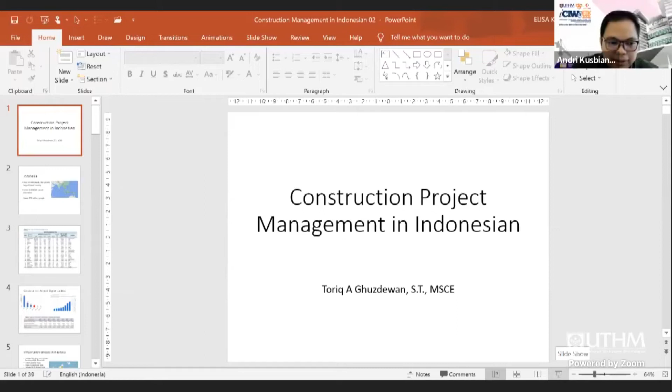Assalamualaikum warahmatullahi wabarakatuh, good morning everyone. I'm very happy that Mr. Andri invited me to join this session so we can share knowledge about construction. Today I would like to share my experience in construction management in Indonesia. Hopefully the audience, whether students or practitioners, will gain knowledge about the profile and environment of Indonesian construction projects, and I hope to get insight from your questions as well.

As Mr. Andri already introduced, I'm a lecturer at Gajah Mada University in Yogyakarta, Indonesia, on the island of Java. It's a beautiful city - we have Candi Borobudur there, which is famous and many of you may already know it. Sometime you should visit Jogja for leisure. Also, sorry for being late due to some reasons, but now I can start my presentation.

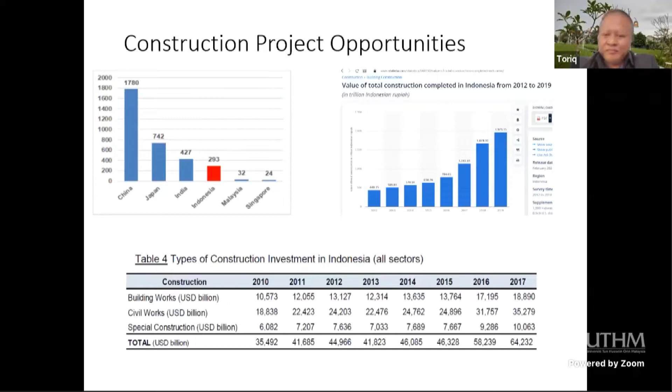If before in Indonesia mostly the projects were funded by government's budget, but now I think it's very fast growing with the private sectors. So we have public-private investment (PPP). Particularly, especially in toll roads and airports, we see growing numbers of projects delivered with public-private investment, something like that.

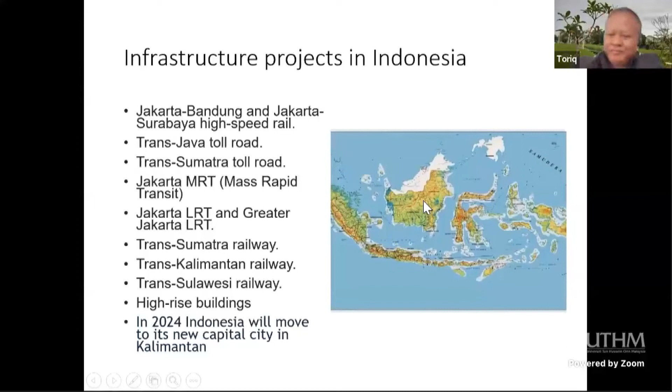Okay, and then about the Indonesian construction companies, we have thousands of companies, but the large ones only few. I think less than 1%. We believe less than 1%, but here almost 2% are the large companies. But I think the real ones are less than 1%. So we have like 130,000 contractors, and the large ones about 1,700.

We can call it the real big one, the state-owned company. We have about 10 state-owned companies, like Adhi Karya, Pembangunan Perumahan, Construction and Investment. Before these were also contractors, and now they're moving into investment companies as well. Nindya Karya, Wika - we have about 10 state-owned construction enterprises.

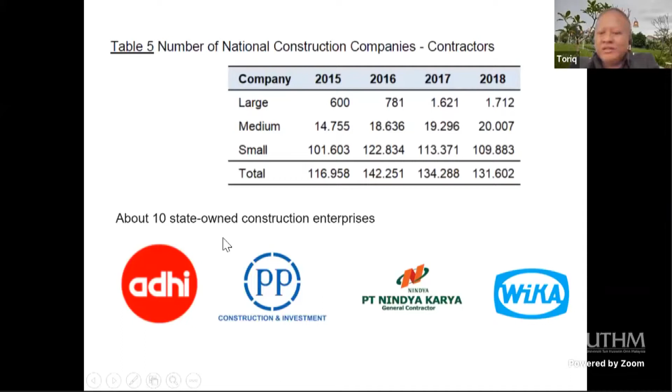I think they are also becoming more independent. Before, maybe there was much support from the government, but now they have to be more independent with their own ability, especially to find the finance.

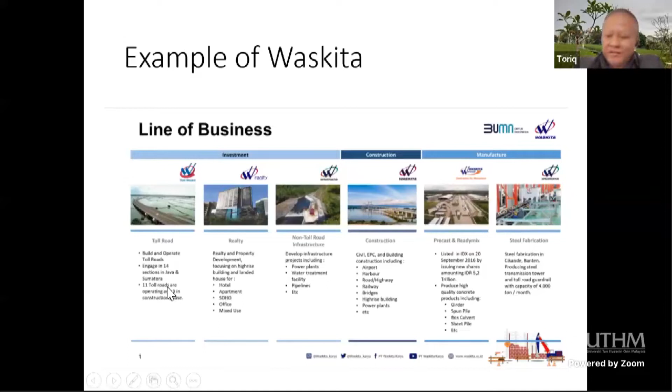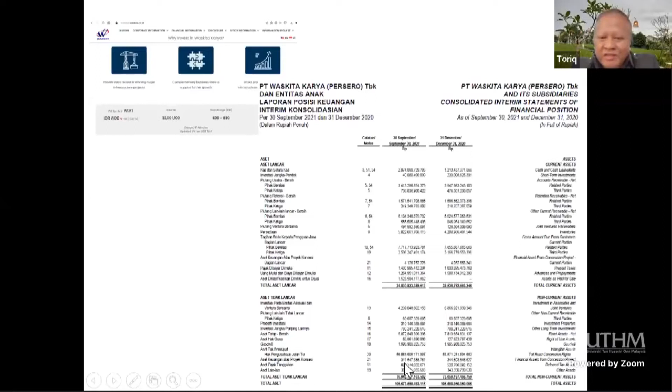This is also an example of the financial reports for the company. Many of these big companies have already gone public - they put their shares on the Indonesian financial markets, like Waskita here. Waskita's share price is 800, and here are some of the financial reports of their company. We see their total assets here are about 105 trillion rupiah.

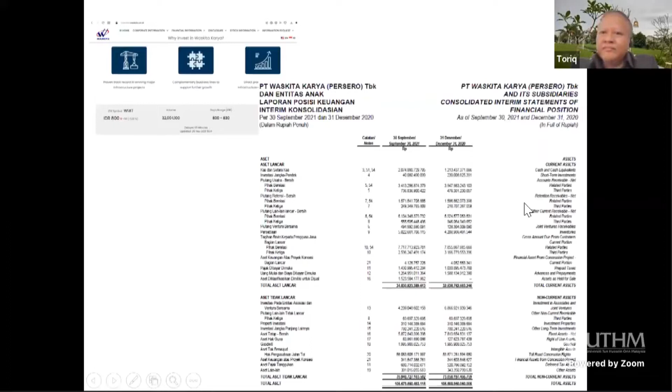In Indonesia we also have quite many foreign companies. This was in 2017, maybe now it's different, but I think it's still about 500. The foreign companies in Indonesia - many of them are from China, more than 100. And then South Korea, Japan - these are the big ones. Malaysia also, we have many Malaysian construction companies here, and Singapore.

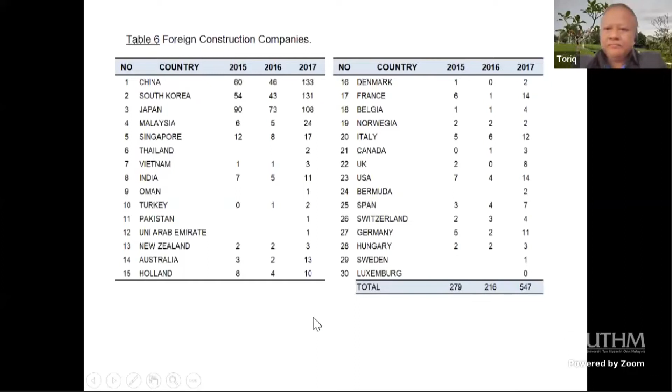I'd like to share about the construction regulations in Indonesia. We have regulation number 2 of 2017. Here we can see that construction business in Indonesia can be divided into two: contractor business and consultants. Contractors are the ones who build, and for consultants we have two kinds of consultants.

They are design consultants and supervision consultants. Design consultants are the ones who design, who plan the work. They make drawings and also make estimates for the owner's sake. The owner will use this as the owner's estimate, and when doing tenders, the owner already has the appropriate budget. Then the contractor will bid on the project, make their own estimate, and the owner can compare the contractor's estimate with the design consultant's estimate.

And when the contractor does the job, the owner can also hire a supervision consultant - one who supervises the project. This supervision consultant's work starts with the contractor's job, while the design consultant already started before, long before construction begins. So we have supervision consultants who supervise the contractor's works.

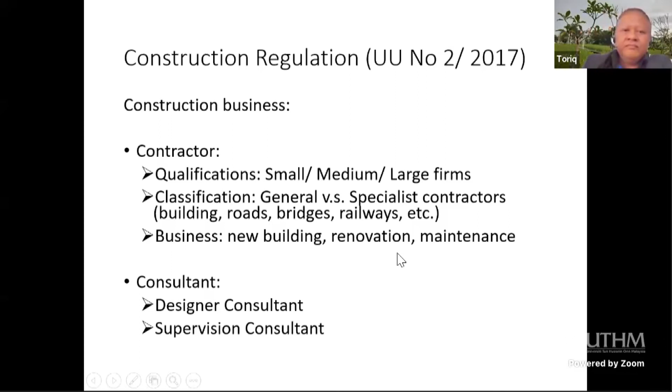And this is the Indonesian contractors' classifications. As I've mentioned, in buildings we have about 112, about 100,000, and civil contractor. This is civil contractor, this is mechanical, electrical, and others. So the contractor should register with the national body to get the certification as a specialist. That's why we have this statistic, this number.

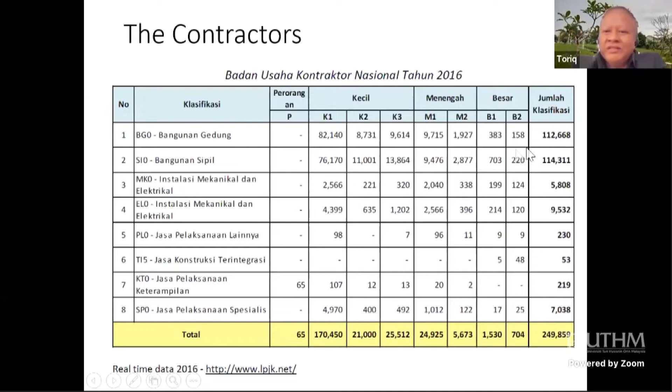And as well as for the consultant, they should also have the certificate of specialist, as an architect maybe, or as a structural consultant, or as a landscape consultant, etc.

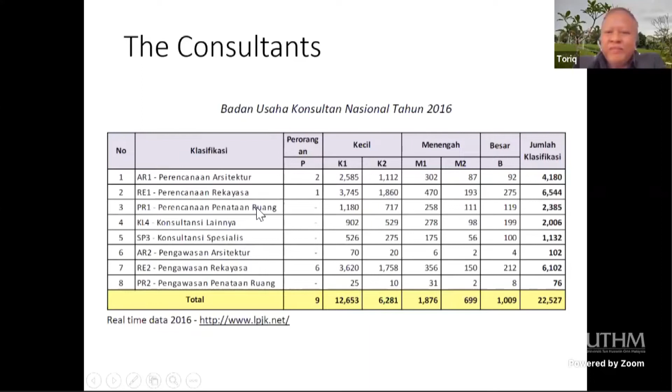And about the construction workers, here we have also quite large numbers of workers, about 1 million laborers. And we basically divide the construction workers into experts or engineers and laborers. Laborers we divide into unskilled and skilled. And both of this human resource should have certification now.

We are now, the government is pushing certification programs, both for the experts or engineers and for the laborers. We train, this is an example of the training for the laborers, maybe carpenters or masonry workers. We give training to them for about 1 week, 2 weeks, minimum 40 hours, to give them the skill.

And for the engineers it is to give the required knowledge. If for the workers it is the skill, but for the expert it is the knowledge, something like that. And this is an example, the certificate for the expert engineers.

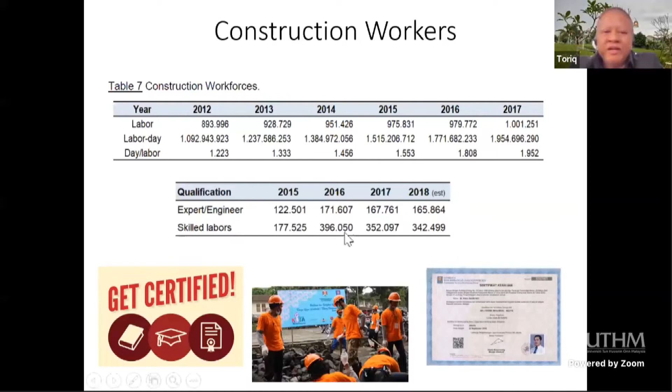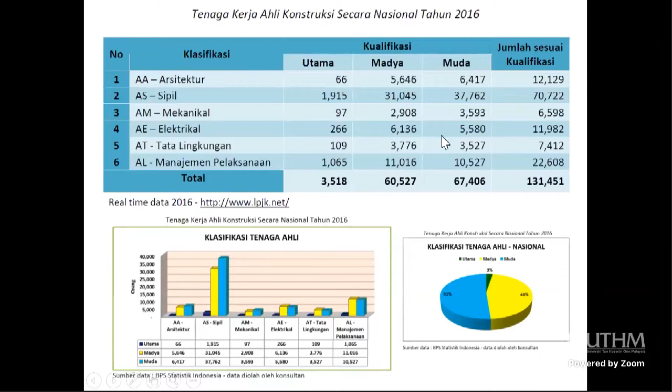We have this statistic as well for the seniors, Madya is middles, and the juniors. And we still have the juniors much more than the seniors, so we only have about 3% seniors experts.

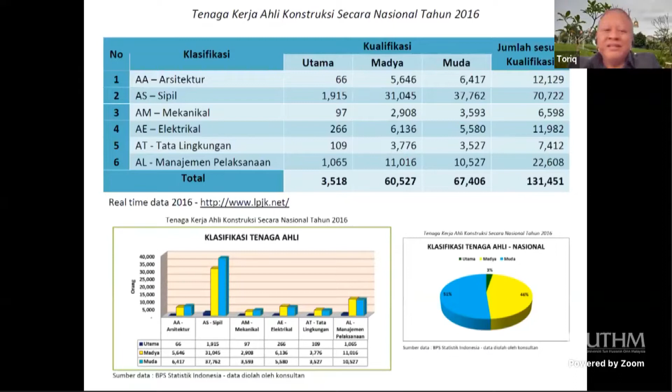And also I think we are joined with the ASEAN bodies, like ASEAN Civil Engineers. I think there is an ASEAN Civil Engineers Charter as well.

And this is the requirement, so this is the requirement for the seniors. The requirement is one should have experience more than 5 years. And for the middle, Madhya, it's minimum 2 years, 2 to 7. And less than 2 years, they have juniors.

And for one who just graduated from university, there is also juniors. They can get the certificate as well, as a junior engineer. So this is the requirement for engineers to work in Indonesian projects.

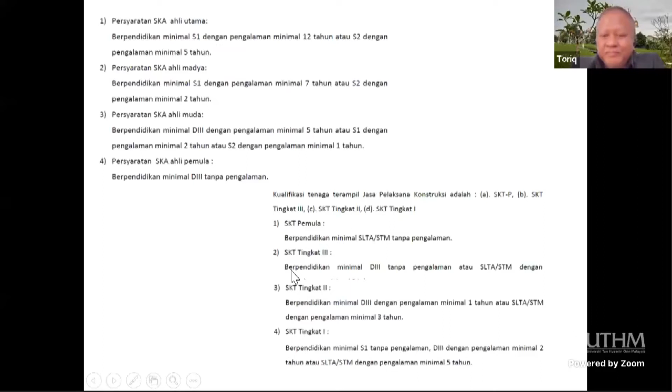If this one is for the workers, so we differentiate between SKA, it's called sertifikat keahlian, for engineers, and SKT, sertifikat keterampilan, for workers or operators.

Yeah, this is the question. And this is the parties in construction, in Indonesian construction projects. So we have, I think, 3 methods of delivery.

This one is the most commonly used, the conventional. So we have owners. Owners usually will appoint design consultants to prepare the designs, the drawings, the specifications, the cost estimate, yeah, something like that. And then once the design is complete, the owners will announce or open tenders to hire supervisor, consultant, and contractor.

Something like that. And the other one is usually in private projects. If private project in Indonesia, usually only use design consultant. But usually this design consultant is also asked to be the supervisor in the future. But usually the private owners only deal with the designs, and then once the design is completed, then we'll hire the contractor.

And this one also now growing, even in very large projects like airports. I found there is also a delivery only on owner and contractor. Yeah, so this is like design-build. So in one airport, I know the owner only appointed one contractor, then the contractor prepared the designs and the constructions. So I think it's more advanced or new in Indonesia that we trust only the contractor.

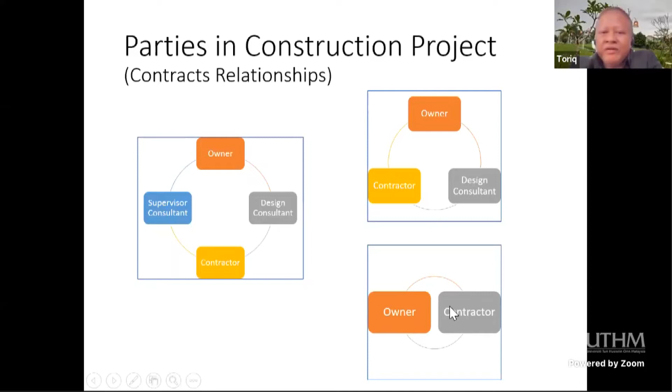It should be ensured that everything is going well, particularly for responsibility with the budget, because this is government budget. But it is growing even in large projects. Now in Indonesia, I think more and more projects are delivered with this kind of contract.

Okay, so project delivery in Indonesia, this is in the government's regulations. We can deliver with design-bid-build. This is the most common use. And then design-build is growing now. EPC is also already familiar, already used for a long time.

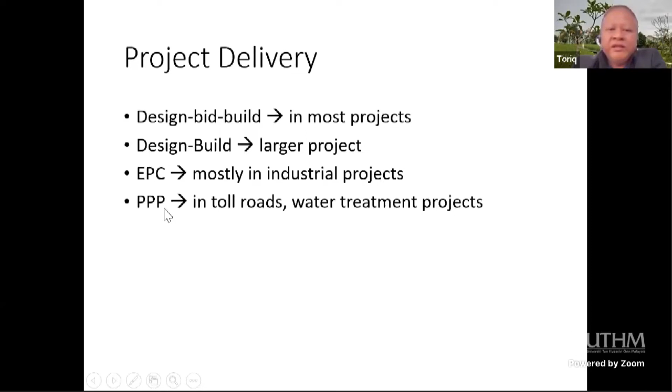And now PPP. But like cost-plus-fee, before it was not allowed in Indonesian projects, but now I think I heard it starts to be implemented as well. For EPC, this is mostly in industrial projects, and then in PPP, this is in toll roads and water treatment projects.

Okay, and then type of contract, we have lump sum, unit price, turnkey, and new. This one is cost-plus-fee. Before it was not allowed, but I see somewhere that it is now implemented. But the one that must be considered is the problem with audits, with cost-plus-fee, because it should really be careful and everything transparent to avoid problems with audits and, what do we call it, collusion problems.

Lump sum means the price is already fixed, and unit price means the price depends on the volumes, and turnkey is basically the payment method, where the contractor will get payment after the project is completely finished, 100%.

Type of bonds, we have bid bonds, performance bonds, payment bonds, maintenance bonds, appeal bonds. I think it is like in the theory, in the project management theory, it's all like this. Except this appeal bonds. Appeal bonds mean, for sanggahan, jaminan sanggahan, particularly this is in the tender stage, when one company maybe wants to appeal to sue the winner, so this company should give a certain bond as a guarantee.

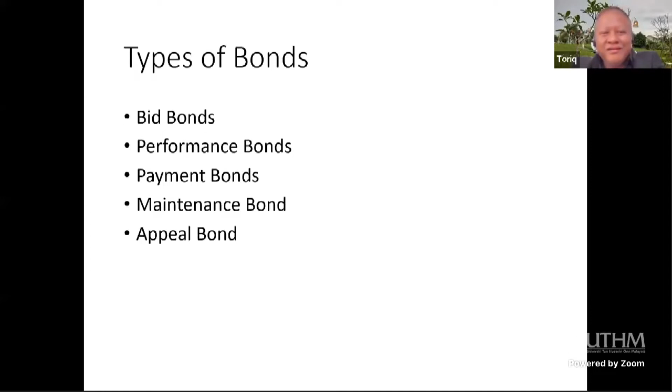And then we also have in Indonesia two types of failure guarantee. It's called construction failure guarantee, or jaminan kegagalan konstruksi, meaning during the construction, guarantee during the construction. So if there is failure, let's say when pouring concrete and then suddenly it collapses, it should be guaranteed by the contractor, something like that.

And we also have building failures, meaning after the project finishes and it is already used, like when we build a high-rise, maybe an apartment, something like that, and then after it's finished and okay, it is used for 3 years and suddenly it collapses, so that means building failure. And the contractor should guarantee the project with 10 years of guarantee.

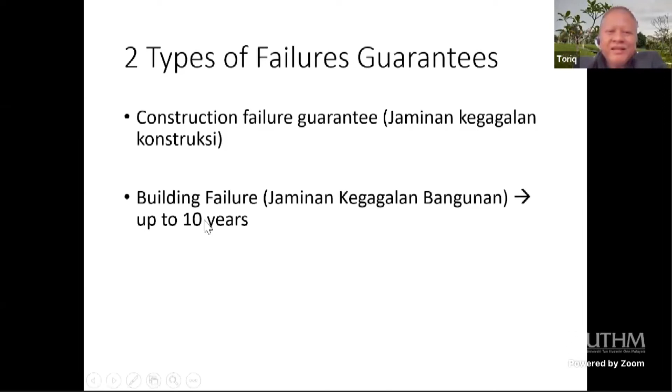So that means if the contractor builds a bridge, for example, and then it's still within 3 years and suddenly it collapses, the contractor may still be responsible to rebuild again. This is the guarantee until 10 years.

Construction problems in Indonesia, we still have project delays, cost overruns, quality, safety, environment issues. I think this is a problem everywhere as well. I think in Indonesia also many projects still delay.

So this is still the challenge: how to overcome delay, cost overruns, and quality, which is also still a problem in some projects. In larger projects I think there are fewer problems, but in small and medium projects we still have concern about quality, particularly professionalism and the workers, because in Indonesia we still use quite mass workers.

Many workers instead of technology. So this is a challenge, particularly in remote areas, where we still lack technology, so it has to be done with conventional ways, with a lot of workers. We still need many programs to improve workers, particularly unskilled workers, as we see from the statistics that unskilled workers are still much more than skilled ones.

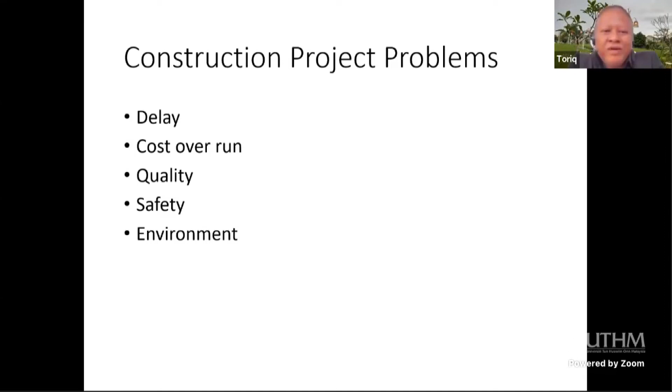Yeah, and I think environment, like in drainage or sewerage channels, even in big cities, they deliver with no concern for safety or environment yet. They just make a hole without a fence, something like that, and it's quite messy, and that's a problem. So we still have to work harder on safety and environment, I think.

And then project management in general is improving from traditional practice to modern, in terms of professionalism. So I think now we are more professional. We have more and more young graduate engineers, and they are quite different from the old ones. They are more professional, better knowledgeable, better familiar with technology. So I think it's much improved compared to maybe 5 years before.

Also BIM is already introduced, although still limited, maybe for truly large projects and government projects. But I think still very few, honestly, use building information modeling.

Improving workmanship, I explained that the government also gives many training programs for this workmanship, so it's better. Some common practice - this is to share the knowledge of some common practice.

In Indonesia, I think in project delivery, cost is mostly maximum guarantee. So most projects in Indonesia use lump sum. Even when we use unit price, the budget is already locked. So let's say if the project is 100 billion and it's unit price, but when it's nearly reaching 100 billion and many works are not finished, then some works will be delayed.

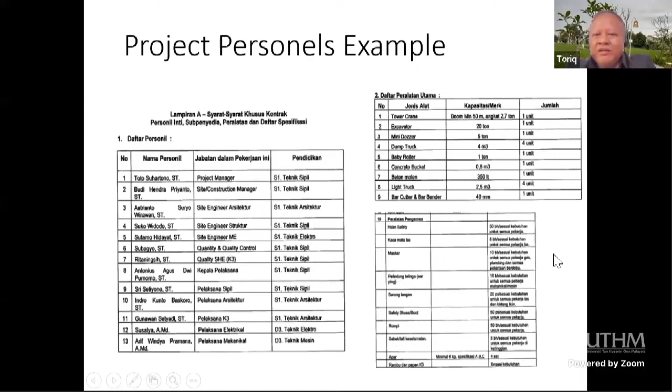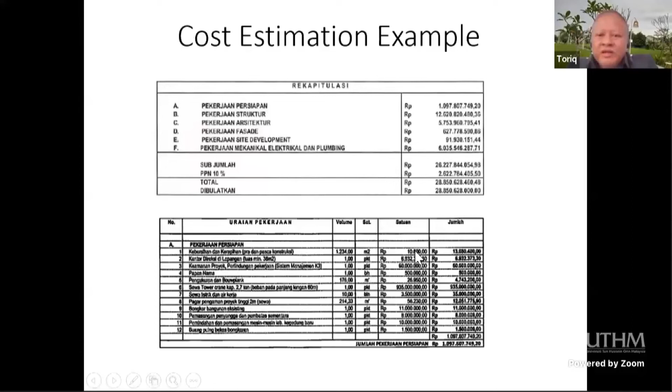The unit price is controlled by the government. We have here public government regulation number 11, which is a reference for cost estimate. So we already have the coefficient here that will be used by the owners.

The contractor maybe can use a different value from these coefficients, but they still cannot exceed them. In total, the contractor cannot offer a higher price than this standard, something like that.

So we have the coefficient from the government, and also the harga satuan, meaning the resource price. The government also announces the resource price on the web, something like this. For the cost of goods, the government already sets the maximum price.

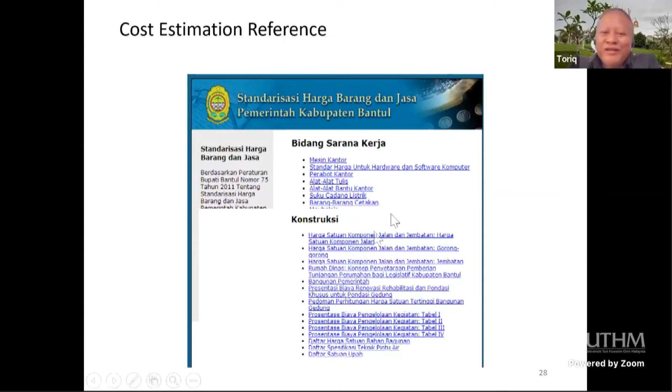It's quite hard actually for the contractor to bid on the project, because the volume and the coefficient are regulated, and the maximum price of resources also cannot exceed this maximum.

So it means the contractors should be able to offer a lower coefficient than this - it means the contractor should offer a more efficient way of working, or construction method, something like that.

And if the contractor offers more than the standard, it will be a problem if there is an audit. It can be a problem because the contractor can be asked to return the exceeded money in the future.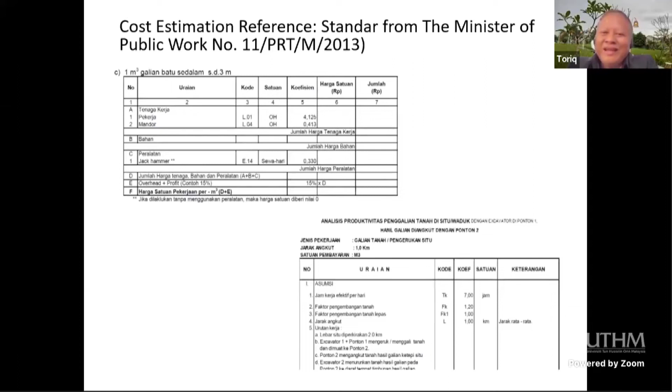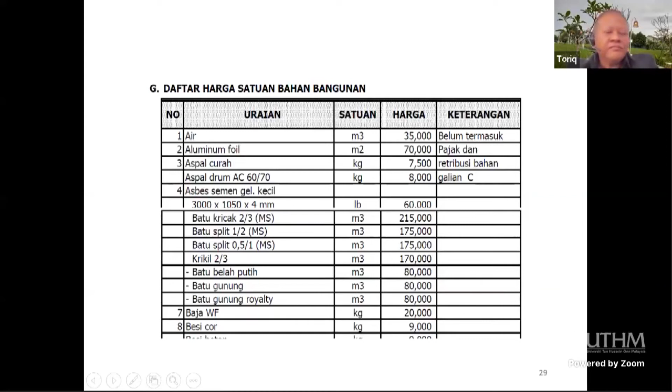This one is from the web - the government already announced the maximum price. This is cost for workers for 1 day, 28,000 rupiah. This is also location-specific, like in Jogja the government will have the standard. In Jakarta it's different. In Kalimantan, the local government will also announce this standard as well.

This is for 1 day. So 1 day in Indonesia means 7 hours, because we work from 8 o'clock to 4 o'clock, and from 12 to 1 o'clock is the break time - break time is not counted. So although it's 8 hours, it means 7 working hours. So if we want to know the hourly rate, this number is divided by 7, not by 8.

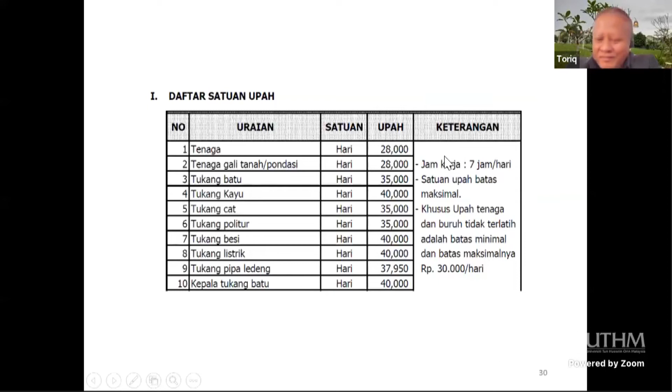This is the example. This is the coefficient from the government's regulations, and this is the cost when the contractor can offer its own price, but cannot offer beyond the regulations.

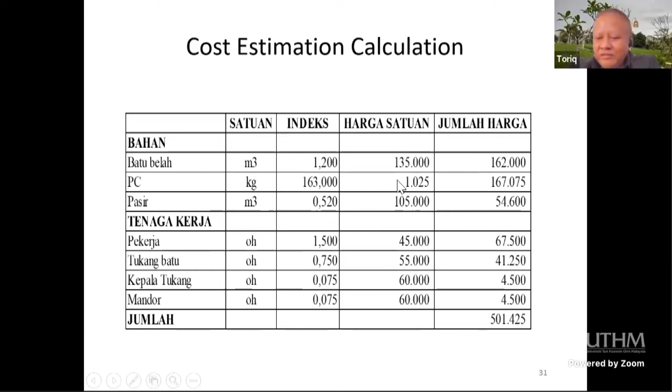For time management, mostly we use bar charts and S-curves. For project quality, we have the specification document, which we call RKS, rencana kerja syarat-syarat. Basically, it consists of material standards and process standards.

We still lack process standards. This is, I think, a challenge as well in the future. The Indonesian construction companies should pay more attention to process standards, like ISO 9000.

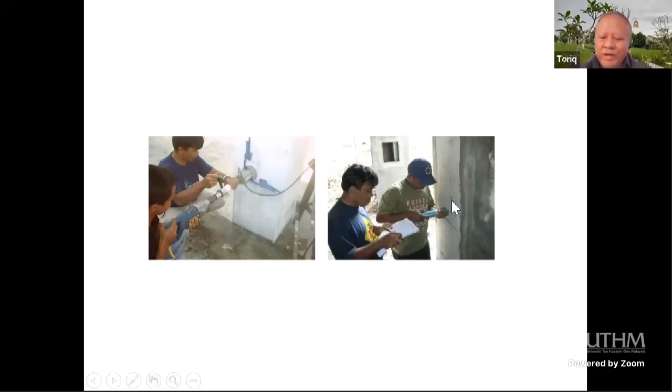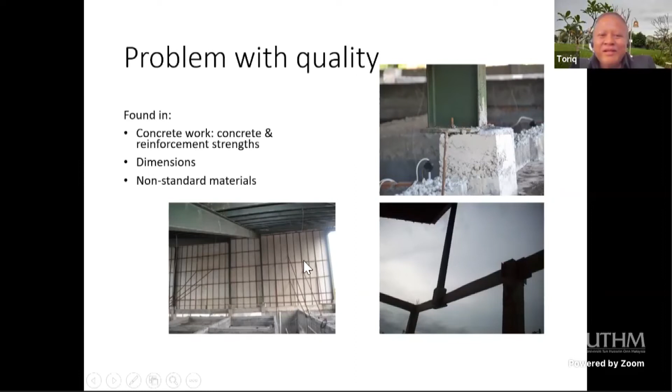This is a sample in quality control, if we want to test the column, the bar, the rebars. This is a problem that I encountered - this is one of the audits that I did on a project where the work had many problems. As we see here, it's not centered, and this is in the wrong place, and the material is also not standard - non-standard materials. We still find quite many problems like this.

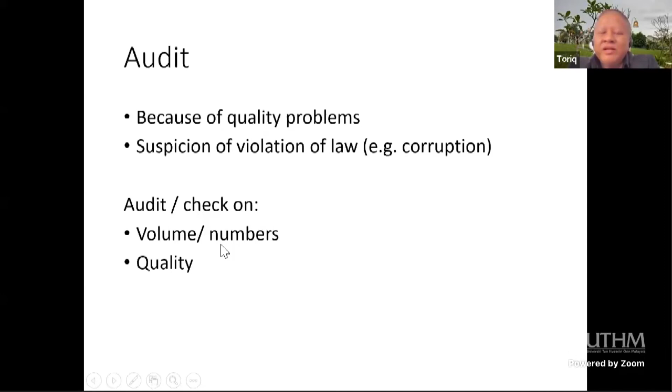Audit. We do audit because of quality problems or because of suspicion of violation of laws. For example, because there is suspicion of corruption. So then the government will do the audit. In the audit, basically we check on the volumes, the number, whether it's real that the volume is correct, and the quality.

Safety, as I've already mentioned before. Improving construction practice, yes, this one, new delivery method. Design build is now growing, better attention on safety, and etc.

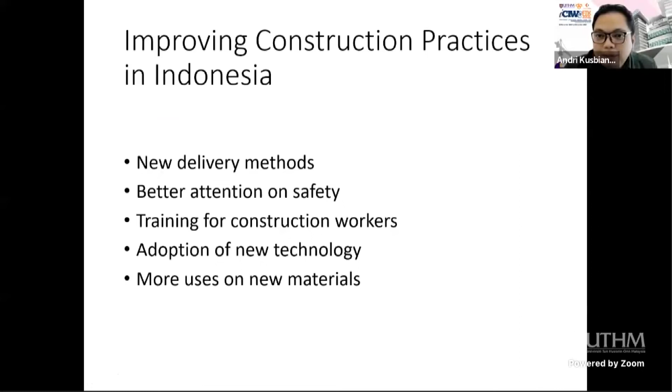While we are waiting for questions from the audience, I'm interested in the current trend in Indonesia, Pak Andri. Just now you mentioned there is quite a number of contractors from overseas, from foreign companies, especially from China, right? I'm not sure if it's a sensitive question, but we know that nowadays the People's Republic of China likes giving loans to countries all over the world. They give massive loans, and when countries cannot pay that debt, somehow the PRC takes over the constructions. Like we see the example of one country in Africa, the PRC took over the airport, and also took over the port, because the country could not pay the debt owed to the People's Republic of China.